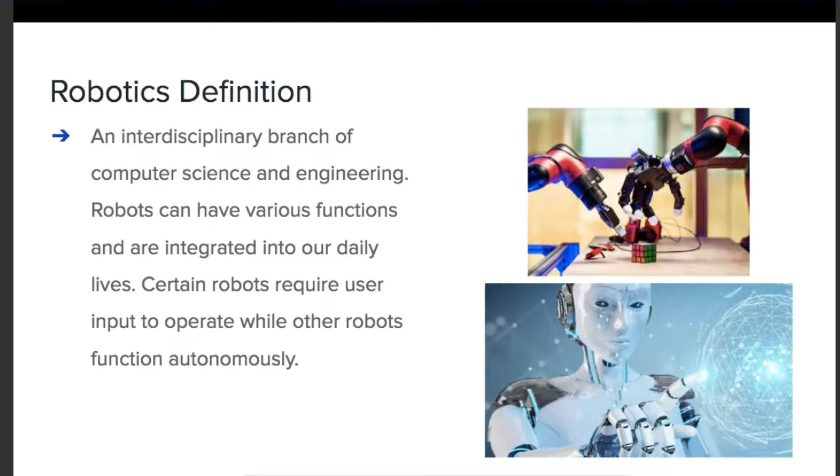A quick definition for robotics: it's an interdisciplinary branch of computer science and engineering. Robots can have a bunch of different functions, and we use them in our everyday lives. You've all probably used a robot today, and we'll go more into that later. Certain robots require user input, while other robots can function autonomously, meaning they can function without any human input, or they can just function as if they have a mind of their own.

You can also see robots in a bunch of different movies, like Wall-E is a robot, and BB-8 from Star Wars. All are examples of robots.

So the origins of robot and robotics: R2-D2 and C3PO from Star Wars, and all these human-like machines. Those are kind of what we think of whenever we hear the word robot or robotics.

Some history: the author Isaac Asimov first used the word robotics in his short story in 1942. In that, he came up with these three laws of robotics that his robots followed, and some other sci-fi authors also followed these laws.

The first law is that a robot cannot injure a human being or allow a human being to come to harm. The second law: a robot must obey the orders given it by human beings, except if it would conflict with the first law. The third law is a robot must protect its own existence as long as its protection does not conflict with the other two laws.

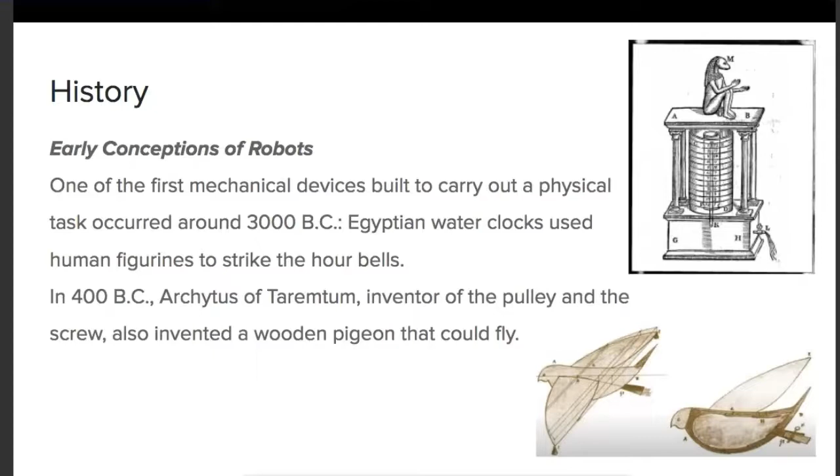Especially in the 20th century, that's when robotics just really became extremely advanced. I'm not sure if you've learned about the industrial revolution yet, but that's when robots were used for basically everything, making all the products that you have in your home today. Robots really are everywhere, even if you may not think so.

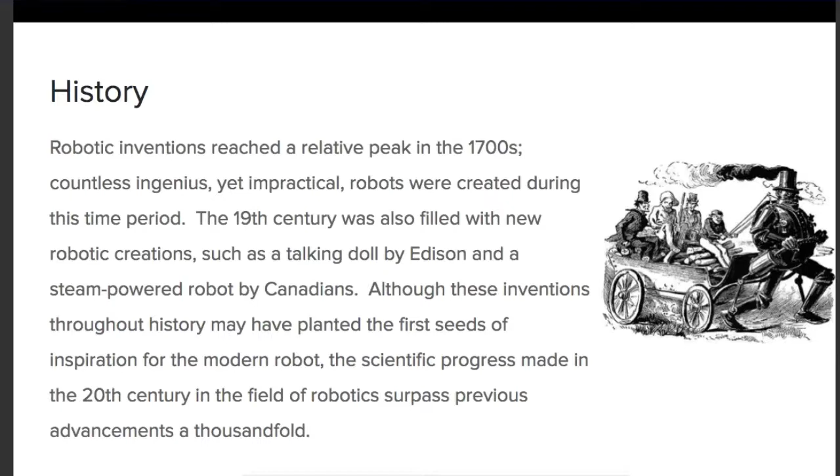Maybe the bed frame you're on, or the table you're using, the nails in it were probably all created with robot machines.

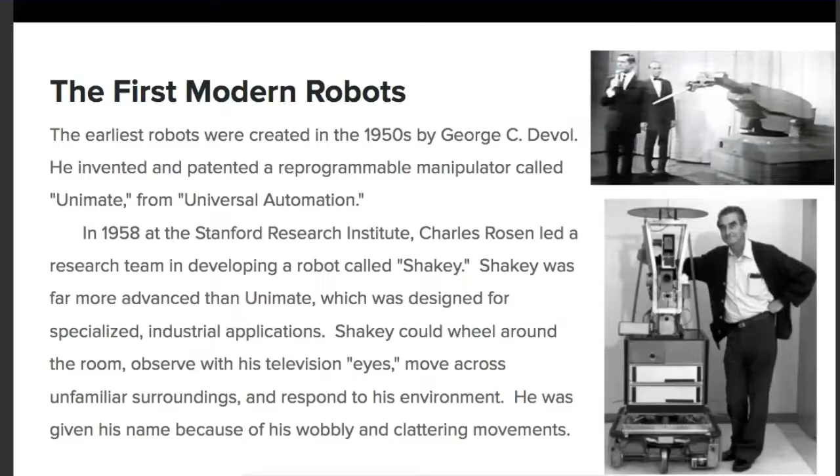These are some of the first and most well-known modern robots. So now we're practically done with the history—we saw what the first robots were like, how they developed, and how more advanced they became. They started with really simple functions, and progressed to a lot more parts, more complicated mechanics, and more functions.

Today, robots are becoming more and more advanced. So now we're going to talk about some technical aspects of robotics, including what makes up a robot. In this case, I'm more specifically talking about competition robots.

If you've visited CCA, you may know of the robotics team Aluminum Narwhals. There are other robotics teams like FTC, which is kind of a smaller league, but they still make really neat robots. This technical part is more centered around those types of competition robots rather than factory robots or sci-fi fiction ones.

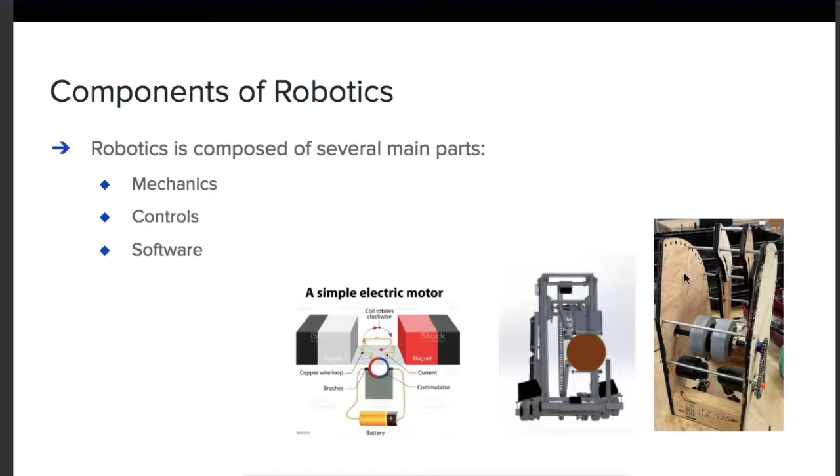So for robotics, there are several main parts: mechanics, controls, and software. Those are the three main parts in a general sense. Here we have some images that we'll go into more later.

Going on to mechanics: mech is responsible for designing and building the robot. For example, if you want to create a robot that can throw basketballs, the mechanical team develops the appearance and structure of the robot—deciding where to place a metal rod or wood plank. Mechanics covers the backbone and overall structure of the robot. There aren't strict set rules, but mechanics typically doesn't include the wiring, which is usually reserved for controls.

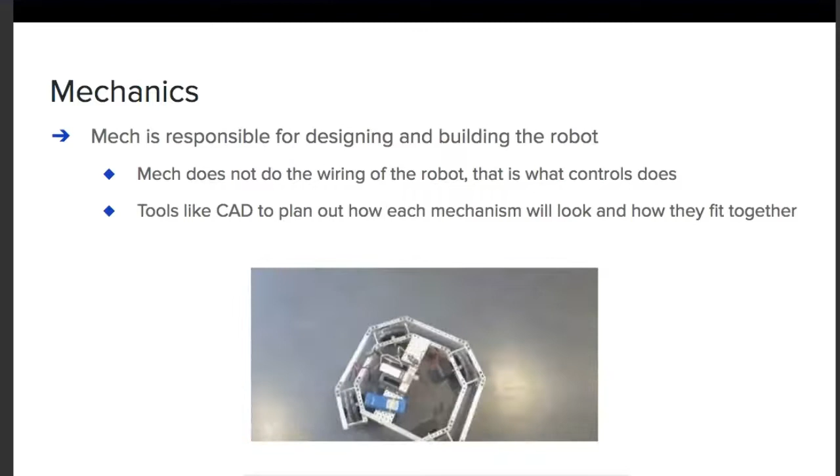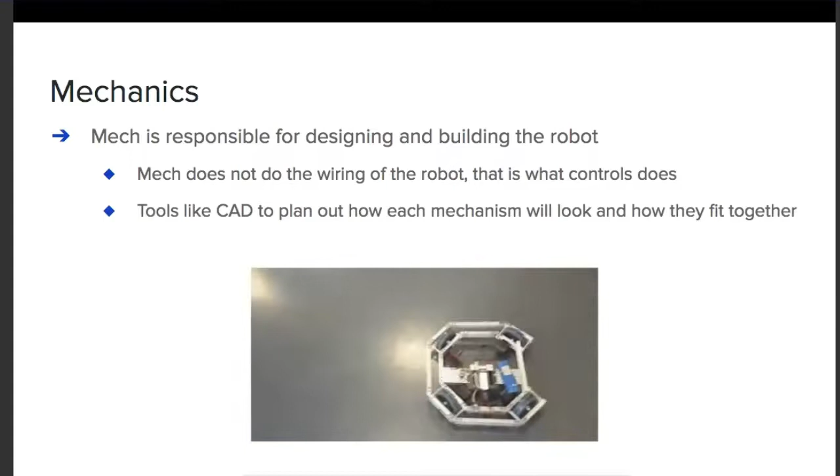More on mechanics: they use computer aided design, also called CAD. That's basically a computer program where you can use 3D modeling to create different shapes or parts to add to your robot, fit them together, and plan out how each mechanism will look. Here's a GIF of a little robot zooming across the floor—you see those metal pieces shaped almost like an octagon or horseshoe. The mechanics team puts together those metal bars, and they're responsible for that general structure.

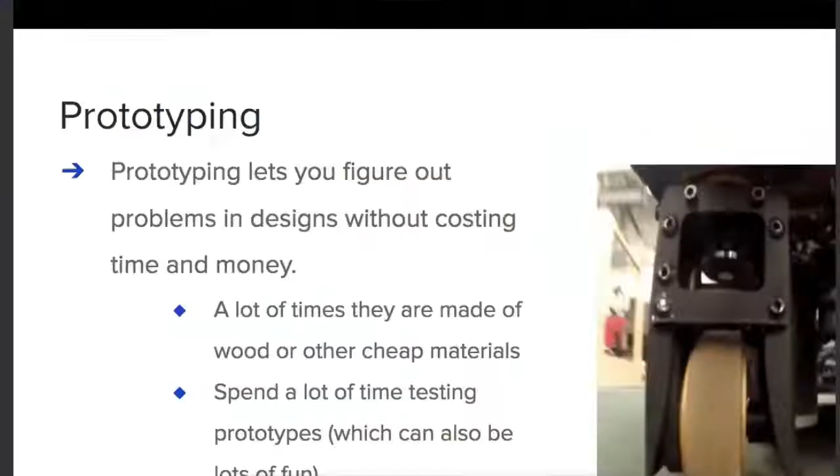So another important part of mechanics in robotics is prototyping. Does anyone know what prototyping is? Essentially, prototyping lets you figure out problems in designs without costing time and money.

Let's say you want to create a robot that can separate tomatoes from strawberries. That seems like a crazy idea, and you don't want to spend your best materials or a bunch of money creating this robot on your first try, because if you use all your highest quality materials and it fails, all that money and time would go to waste.

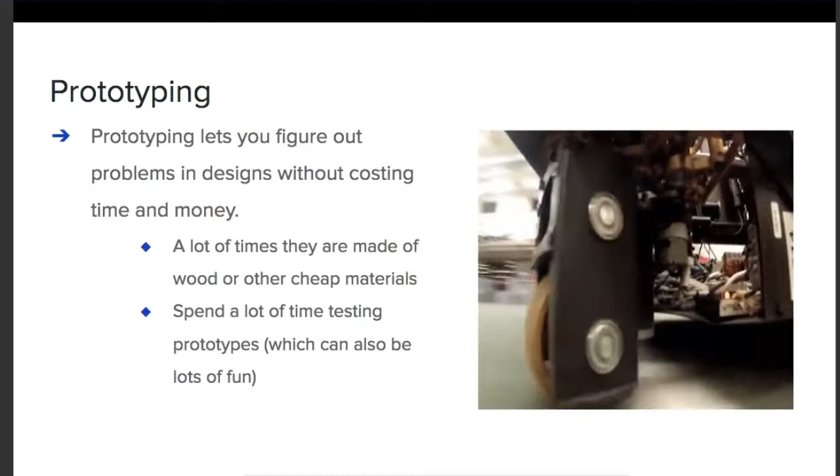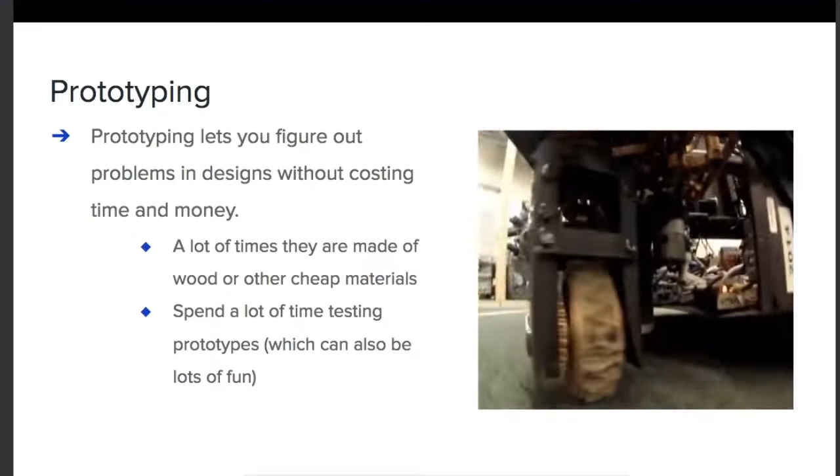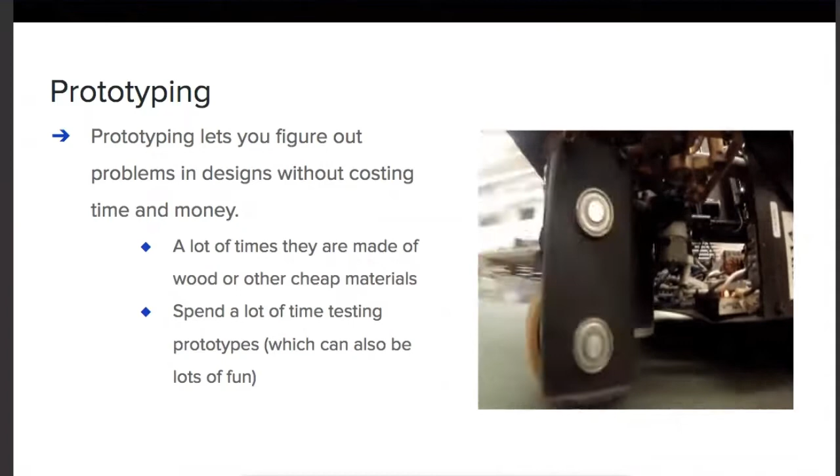Basically, prototyping is where you use really cheap materials and a more loose design, so you can test things out and see what works and what doesn't. Summing up, it's using much cheaper materials like wood or styrofoam. It's important to spend a lot of time testing prototypes, which can also be really fun. Prototyping is really important so you're not wasting time and money trying to make the real robot without ever testing things out through trial and error and seeing what fails. So remember, prototyping is always important if you get into robotics.

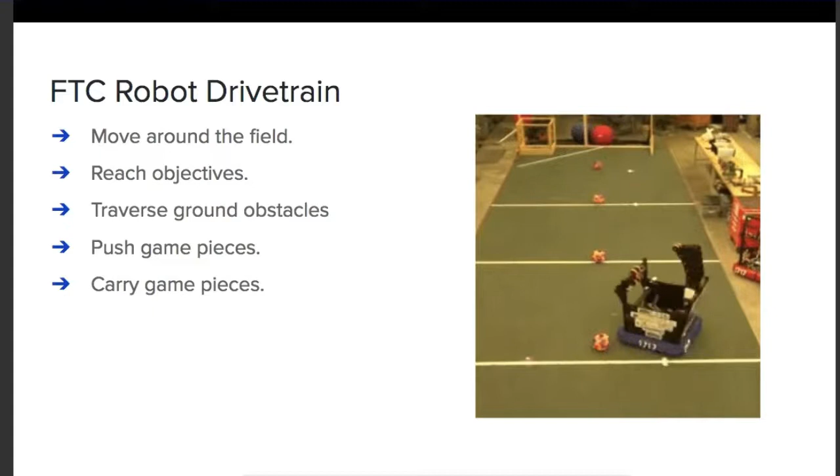If you guys have any questions, let me know. I know FIRST Robotics is pretty niche—it's a really specific part of the whole field of robotics—but this is more related to us because we're all students.

So we'll move on to controls. The previous part was on mechanics, and later on we're going to have a lesson specifically on the mechanical parts of robotics, which is a whole different lesson with a lot of interesting parts. If you want to know more, stay tuned for that lesson—I think it's in a few weeks. But here, we're going to go ahead and talk about controls.

So controls—if you hear the word controls, it sounds kind of weird, like controlling, whether it's the remote or something. But the controls aspect has to do with wiring and a little bit of coding, but it's mainly the wiring details and all that. So, electrical engineering of the robot, batteries—that's what controls deals with.

And there's also going to be this wire hub on your robot. If you don't know what that is, a wire hub is basically where a bunch of wires meet, or where you can organize all your wires. Wires are important so you can get the motors on your wheels to move, and get your batteries to actually power your robot.

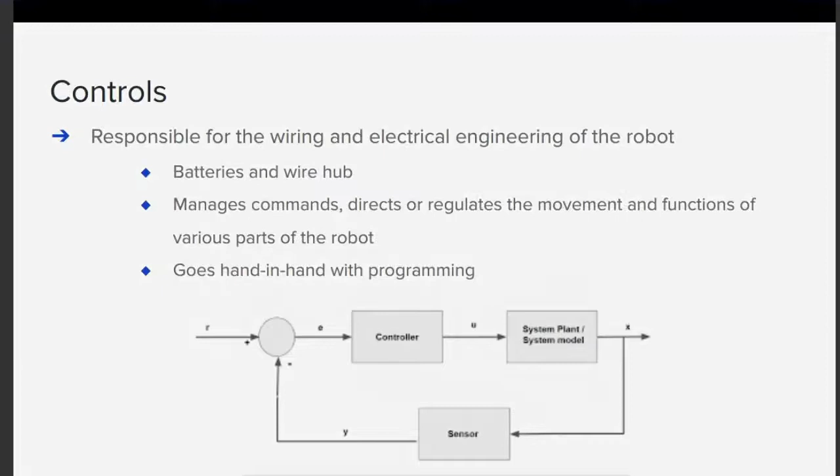Now we're going into more software related things: Java. Java is a programming language that is widely used in robotics and a bunch of other uses, but right now we are centered on FIRST robotics. Java and JavaScript are really common in FIRST robotics competitions, so Java is really helpful to know. If you remember, in our first Girls in STEM session, we taught the basics of Java. So Java is just a really useful coding language.

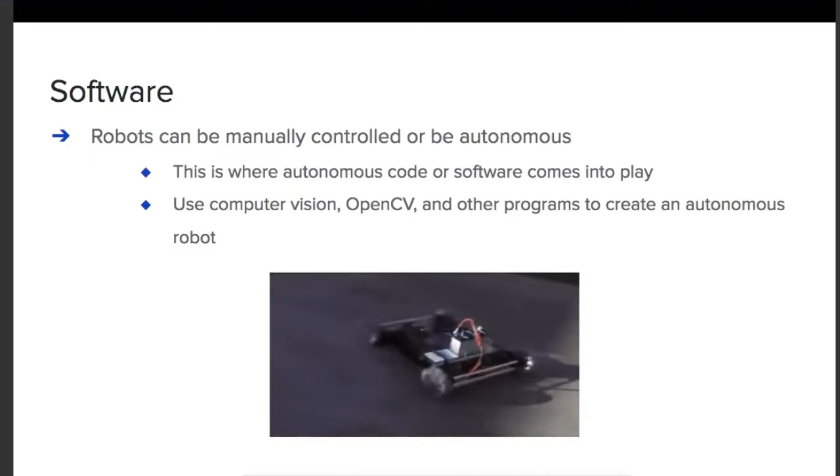However, an autonomous robot is where a human is not controlling any of the movements. It's the robot itself detecting the environment on its own. And it's not because it can think on its own, but because of the code. So code allows a robot to just fully act on its own, which is pretty cool.

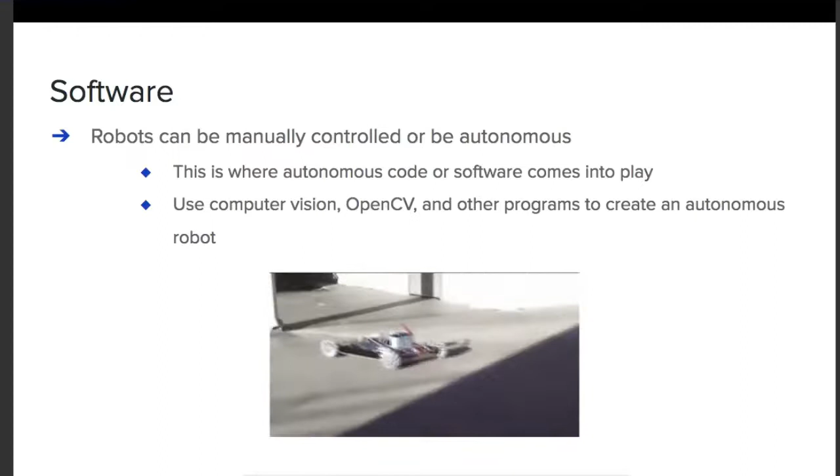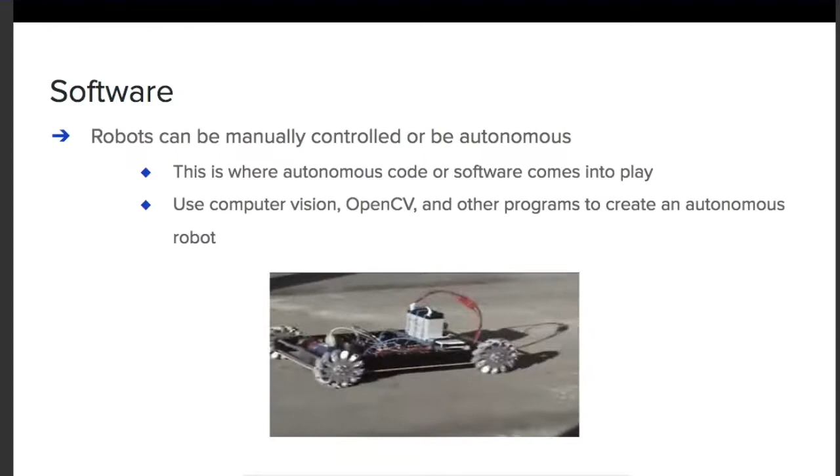It can be scary, because if you've seen those sci-fi movies like the Terminator, or robots taking over the world, those are autonomous robots that can think on their own. But right now we don't have to worry about that. Still, we never know, so it's just something to keep in mind.

Some more methods, and we also have some code telling the robot to move. There's a lot that goes with it.

So if you want to, we'll take a minute so you guys can look at the screen and try to dissect it. I know it looks really scary, like there's a bunch of words on the screen that probably don't make sense, but try to just read it and see if you notice anything. We'll give you guys a minute or so—sometimes you might be able to figure it out yourself, but even if you don't understand it right now, if you slowly look at each line, it might make more and more sense. Alrighty, so hopefully you had some time to look over this code.